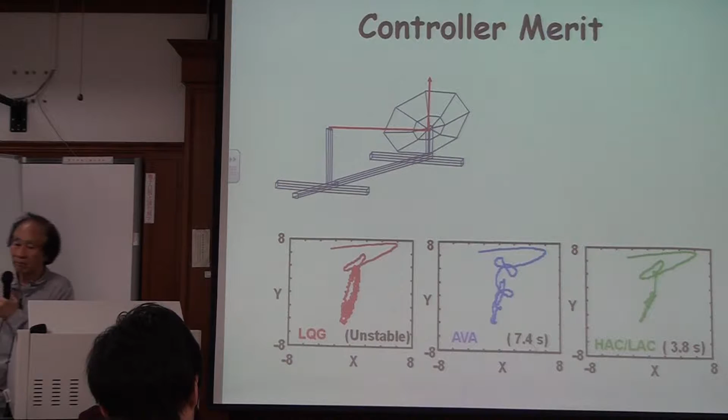That means if you don't model your system very well, for example, you miscalculate your mass, you miscalculate your stiffness, then even so, because AVA is a dissipative control design that is not sensitive to the system parameters, the system is still stable. However, the performance may not be satisfied.

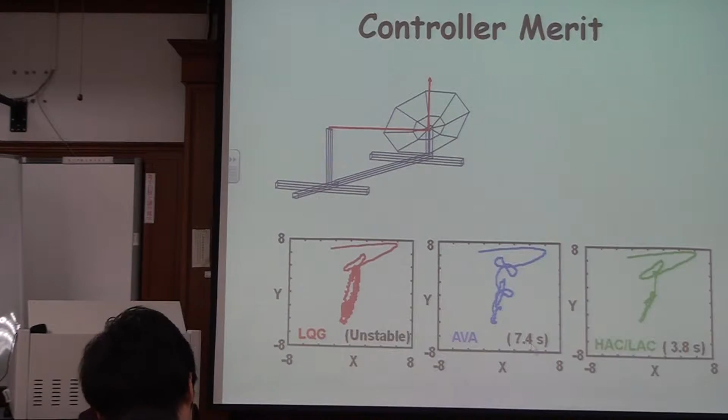In other words, AVA just guarantees you the stability, but it may not meet your performance. So it may not meet the performance.

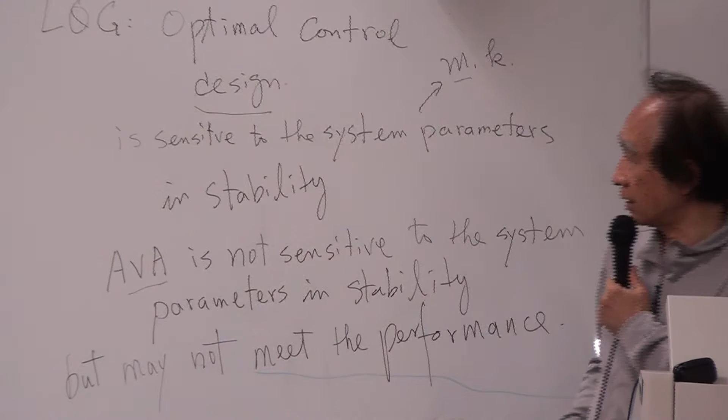All right, the LQG. However, LQG is better in some sense because LQG is designed to meet your performance. But if your parameters are not exact, then it may not be good because it may not be stable. So, because of that, we add them together. If we add LQG and AVA together, that's these figures.

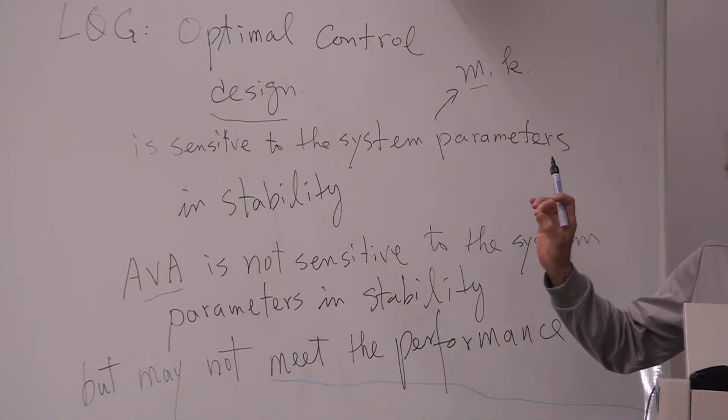So you add LQG plus AVA together, then your right-hand figure, the green color, means you are stable and also meet your performance. Here we have 7.4 seconds to meet your performance. Here we have 3.8 seconds. In other words, if I add LQG on top of AVA, then I can make my performance much faster.

So this is 7.4 seconds to meet your performance, this is 3.8 seconds. That's the real sense. This is not simulation, this is real experiments. This HAC. What do we mean by HAC? H means high, A means authority, C means control.

Okay. Now here we have LQG. This is high authority control. And the AVA is a low authority control. The high authority control doesn't mean it's always good. Low authority control doesn't mean it's always no good. This is really for stability, this is for performance. So the controller designed for performance we call high authority control. The controller for stability we call low authority control.

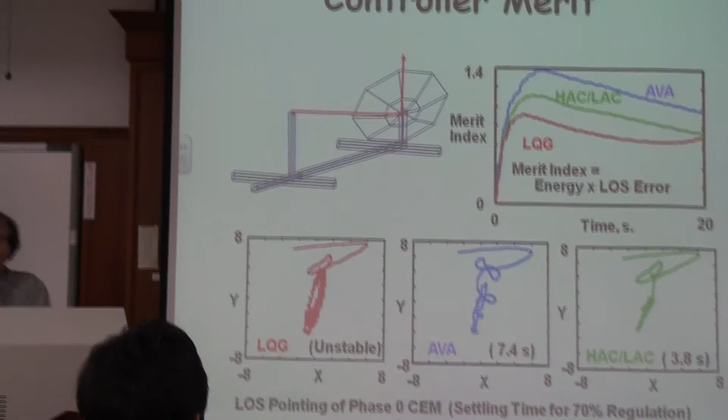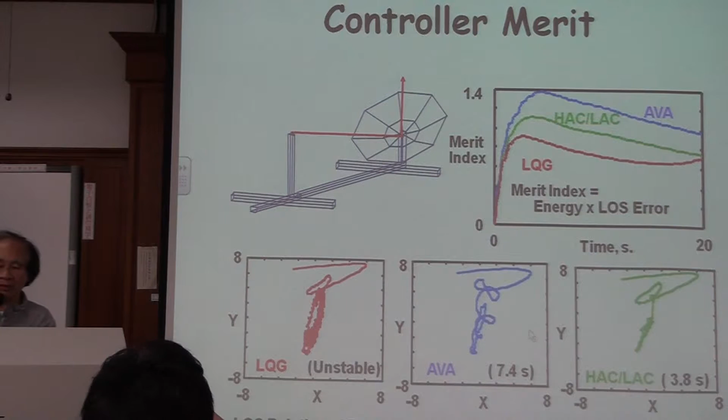AVA, in terms of merit index, is not as good as LQG. However, after 20 seconds, it's still stable. So as time goes on to 100 seconds, the LQG merit index goes up, and the AVA goes down. Now, if you add them together, they are in the middle. The green color is the merit. After 20 seconds, it's really good. Before 20 seconds, it's worse than LQG, but better than AVA.

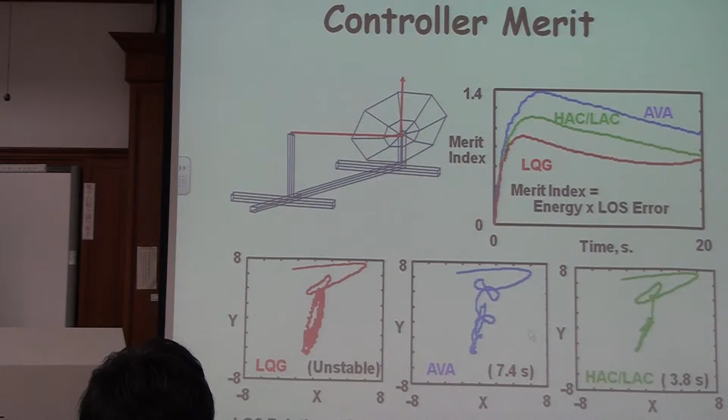And that is the message I try to tell you: sometimes one control design may not meet the performance. So you probably need two control designs added together, and that gives you better performance. This is a very practical exercise. So like Taipei 101, perhaps if we add one more control, HAC, high authority control, it will be even better. But of course, it may not be necessary because earthquakes don't come every day or every second.

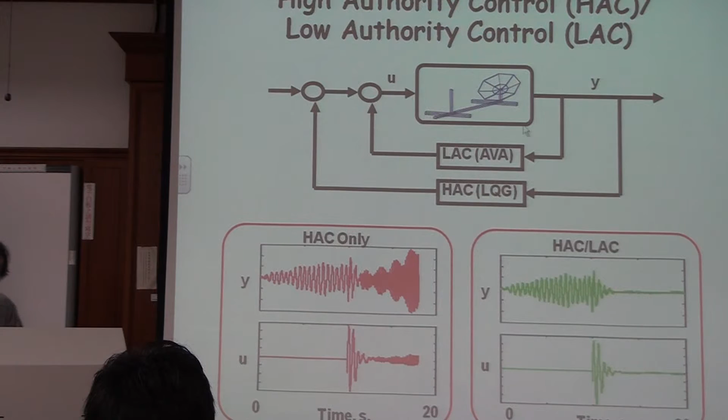Now we conclude this controller design. The AVA controllers we introduced in this class show robustness and effectiveness in dissipating the vibrational energies. In your homework, we will give you some exercises about frequency-matched AVA. For example, in homework number 4, I say the AVA frequencies and my system frequencies are identical.

Okay, let me just show you this. When you design a controller, you need to be very careful about those. If we have a system, this is the system, this is K. And when we design a controller, I call this MC, this is KC. Without this, the frequency of this is the square root of K over M. That's my frequency, right?